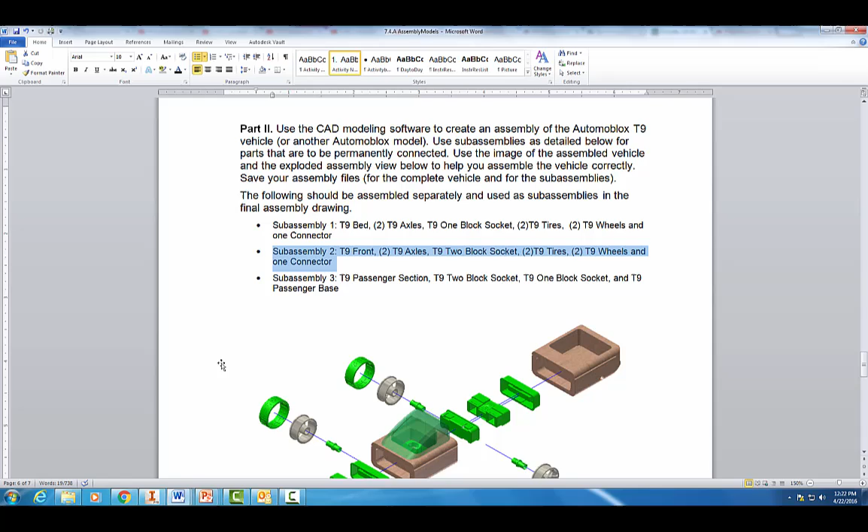Let's go ahead and go into Autodesk. When you're all done, it should look hopefully something like this.

Let's go to a new standard assembly file. Go ahead and hit create.

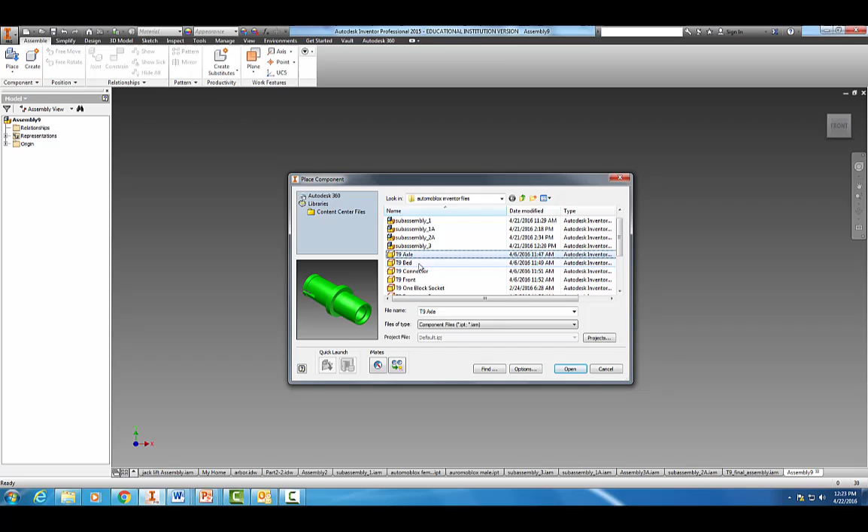Let's go ahead and place our parts here. We're going to have to bring in more axles, wheels, and tires. So we want the axle, the connector piece, and the T9 Front.

Hold down control and you can select more than one. The 2-block socket, let's see here, we got the tire and the wheel. Okay, let's hit open, place them there, hit escape.

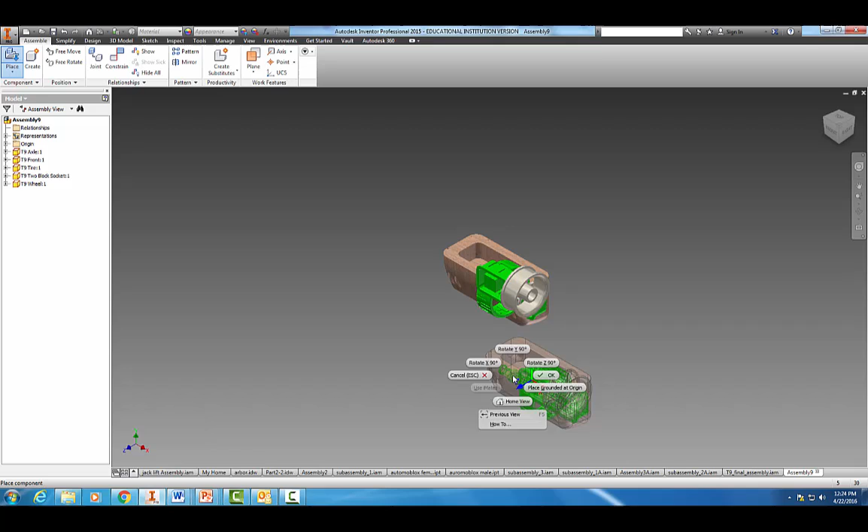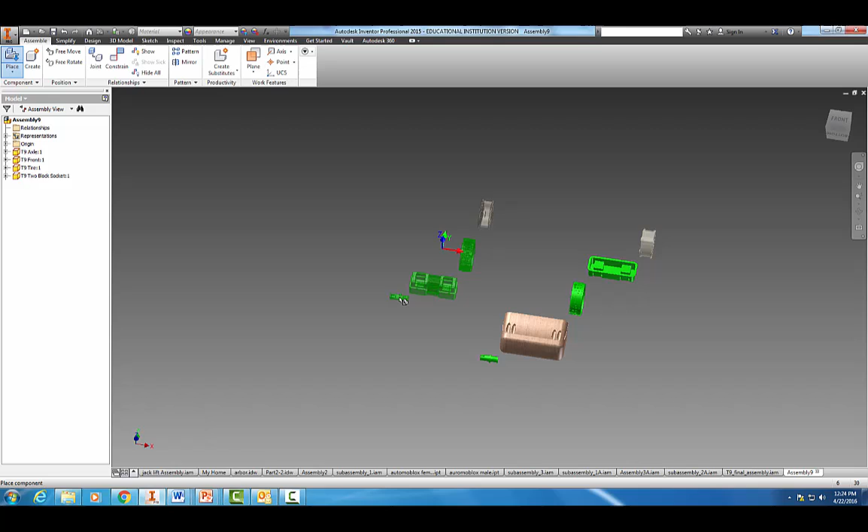So we have that. I didn't get the connector piece, but we'll bring it in here. So let's bring in the rest: the connector, hold down control, we're going to want another axle, and another wheel and tire. Hit open, let's place them over here, hit escape.

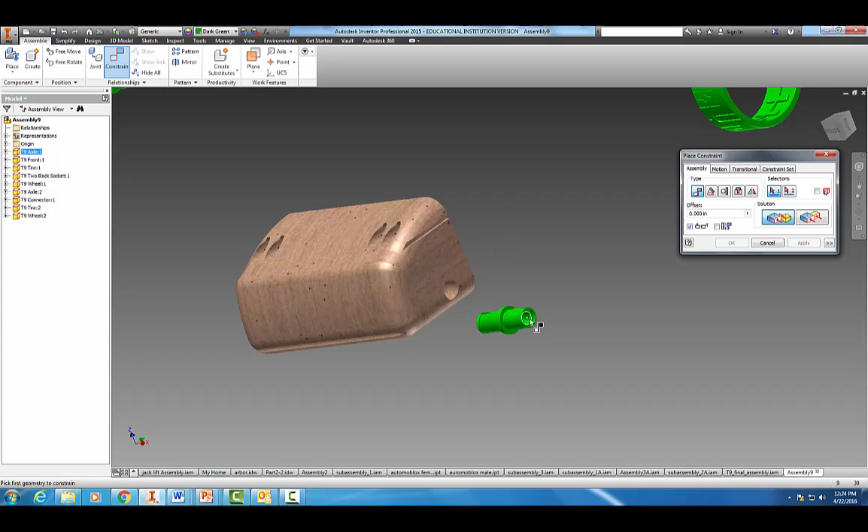Let's go ahead and start putting our axles in first. You guys have done this before with the back end of the T9 part. So we're going to go to constrain here, and once again, let's do that axle to that axle. Apply, cancel, and let's drag it out so we can better see it here.

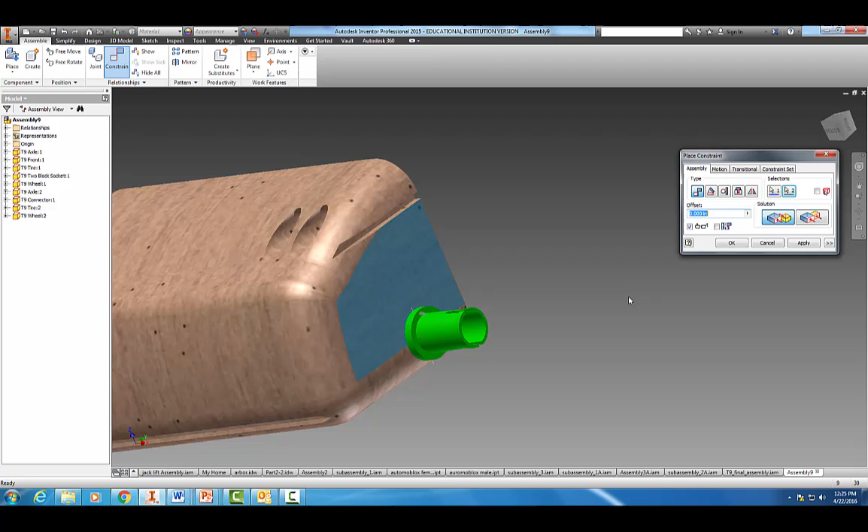Once again, constrain, I'm going to zoom in. We want this face to mate with that face. Hit apply and cancel.

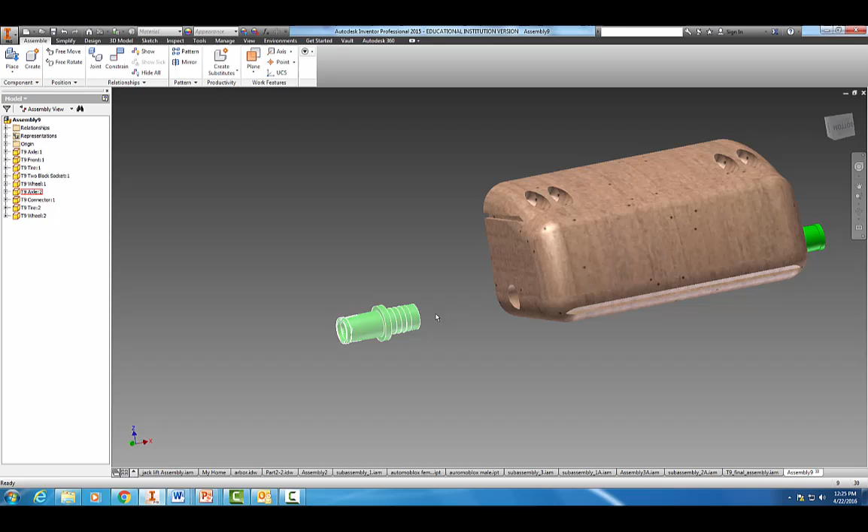Real quick, let's do the other axle. Apply and cancel. I'm going to do the same thing here, a mate with that surface to this surface. Apply and cancel. Okay, looks good.

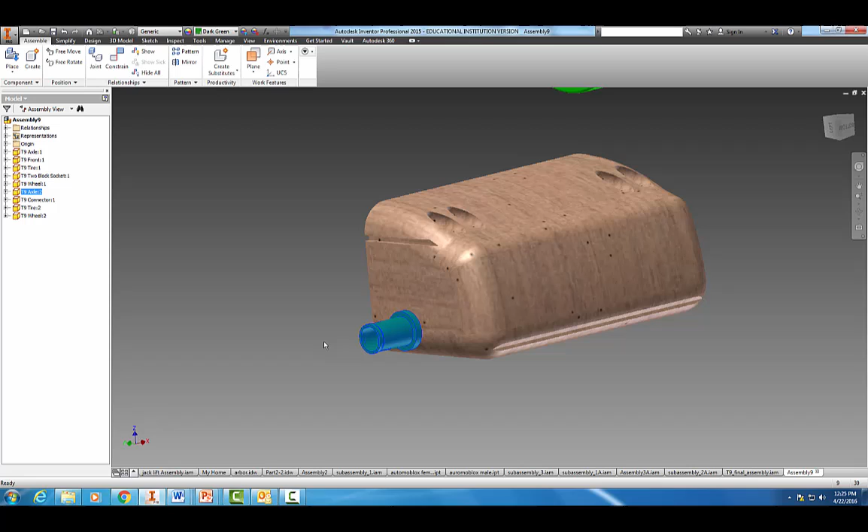We got our two axles in. Now remember, we're only constraining them 2 times, so that will allow our axle to spin. If we added a third constraint, it wouldn't spin in here. Okay, I'm going to zoom out.

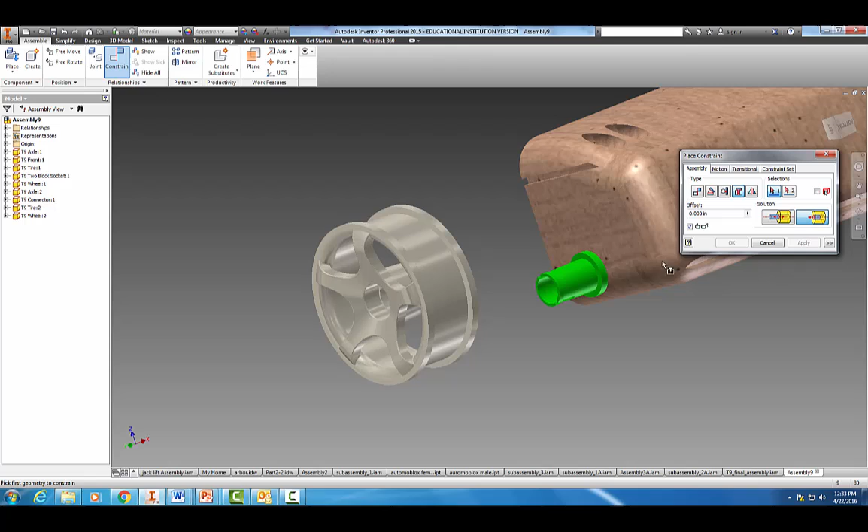Let's bring in our 2 wheels here, bring them over here. Okay, let's grab our constraint, and this time we're going to use an insert constraint, and we're going to select the aligned option. We're going to come from this edge to that edge. Apply, cancel. Let's go do the other side.

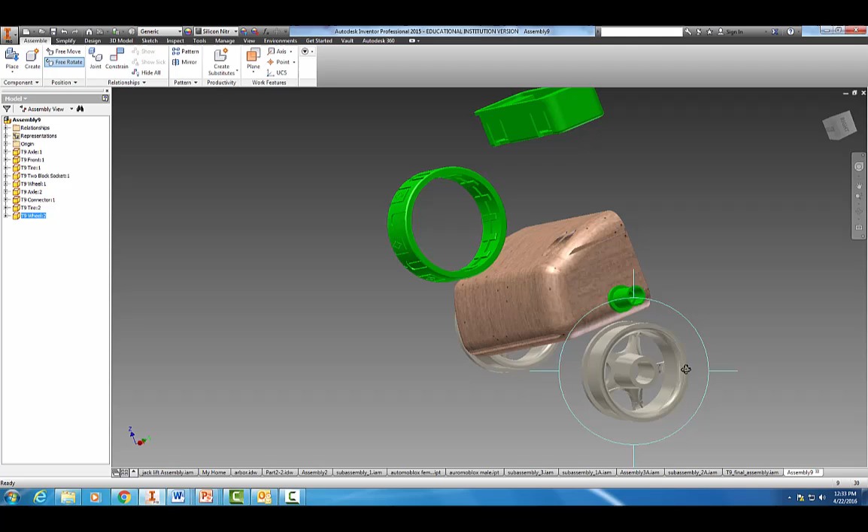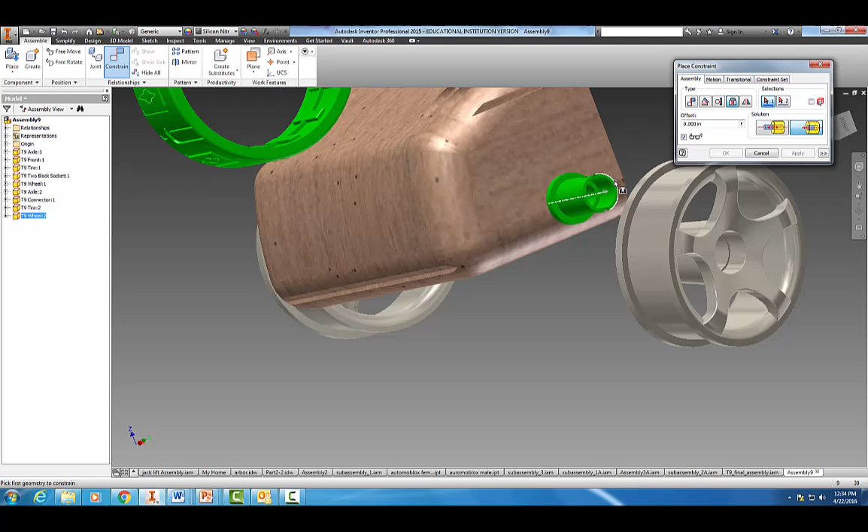Okay, I'm going to turn this guy around, do a free rotate. Do a constraint, same constraint we just used, insert, aligned. Try that again real quick. Okay, got our wheels on.

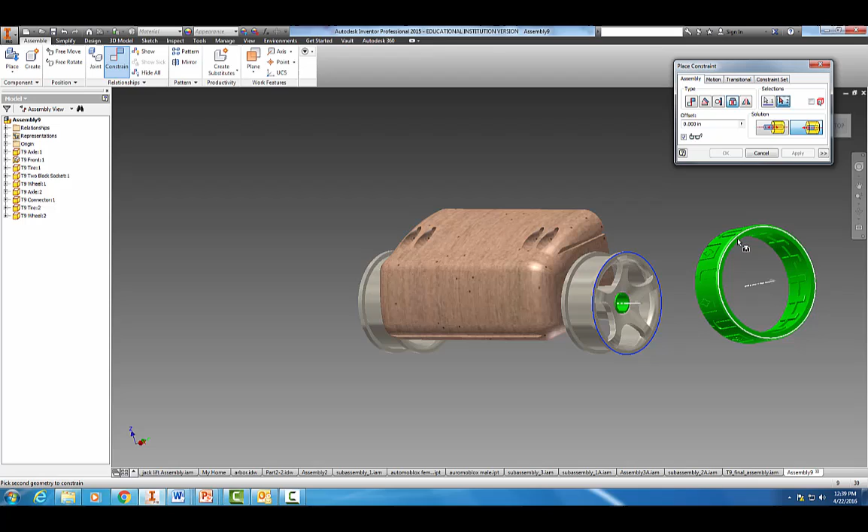Let's bring our tires over. Okay, let's grab our constraint again, and we're going to use the same one, insert and align. We're going to find that outer edge here, and let's align it with that outer edge. Okay, hit apply, and now cancel.

Let's see here, so let's minimize that in our origin. Okay, tire, same thing. We're going to constrain our XZ plane here to that XZ plane so they roll together. Apply and cancel.

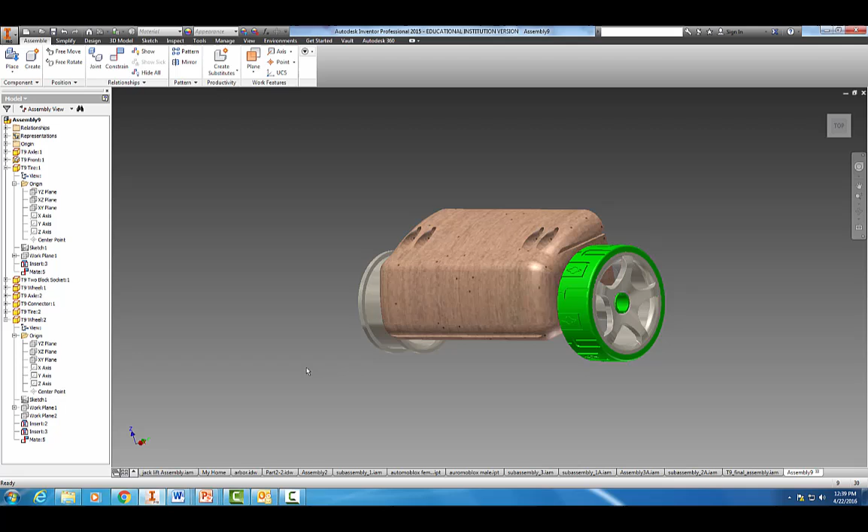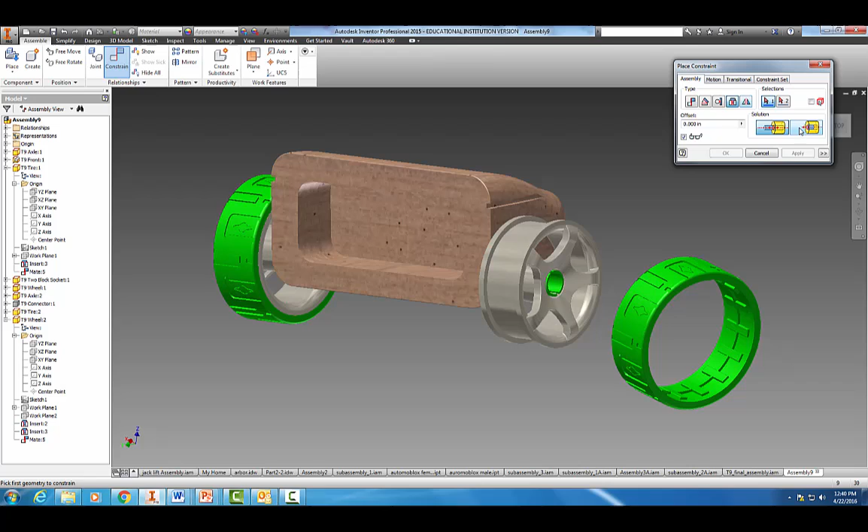Okay, now let's put on the other tire. Same thing: insert, align, that one to that edge. Hit apply and cancel. Alright, I'm going to minimize these again.

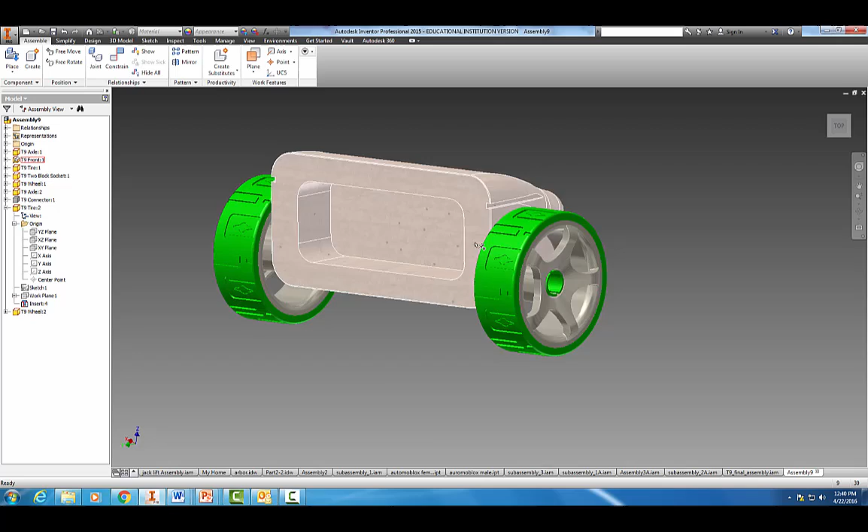Let's see, that is this tire. Hit the plus sign, origin, see what the wheel is - wheel 1, and once again the origin. Constrain those same axes we just did, XZ to this XZ, and hit apply. Cancel. Okay, now let's put in our 2-block socket.

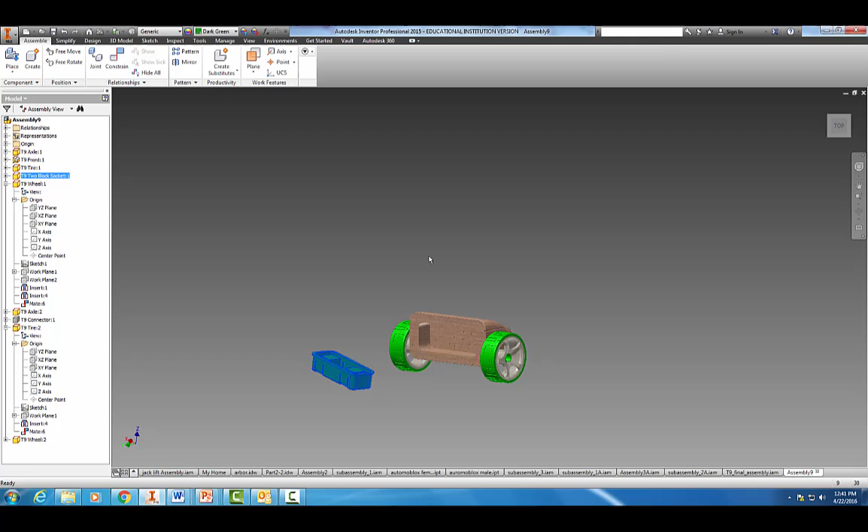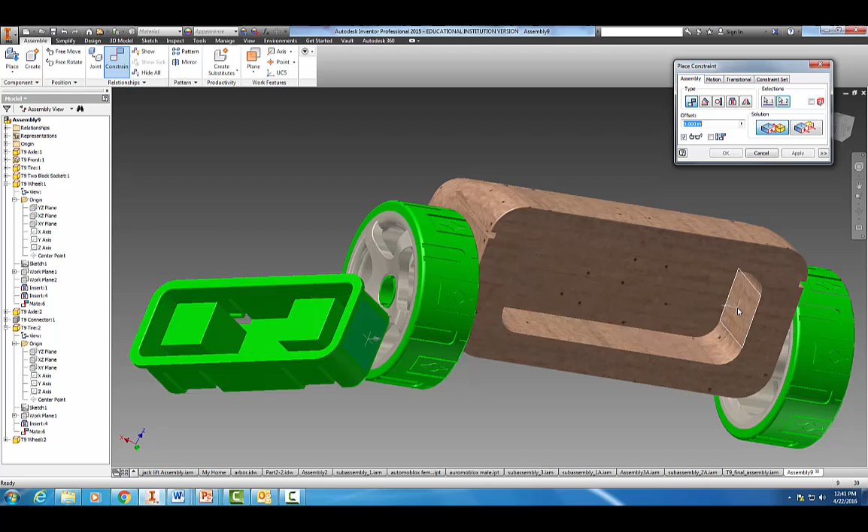So let's go ahead, I'm going to just do a quick free rotate. Hit escape. Let's do a constrain mate, that surface to that surface. Apply. Let's do one more, that surface mate to that surface. Hit apply, cancel.

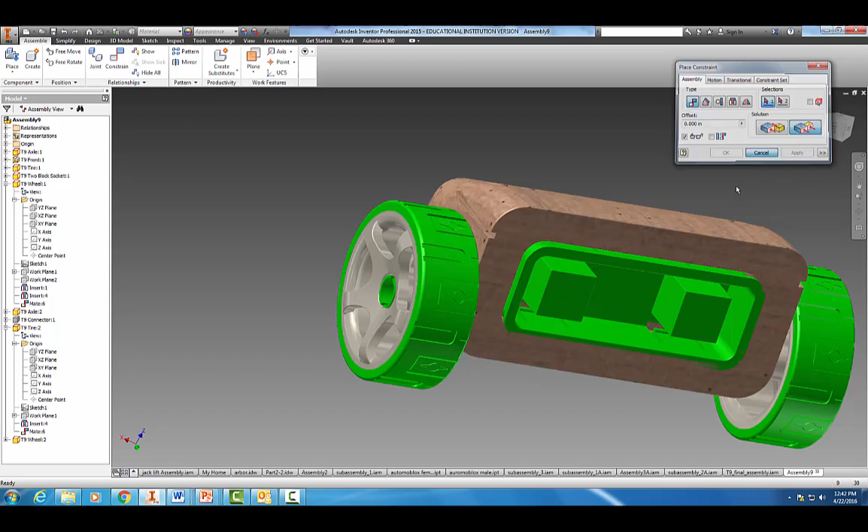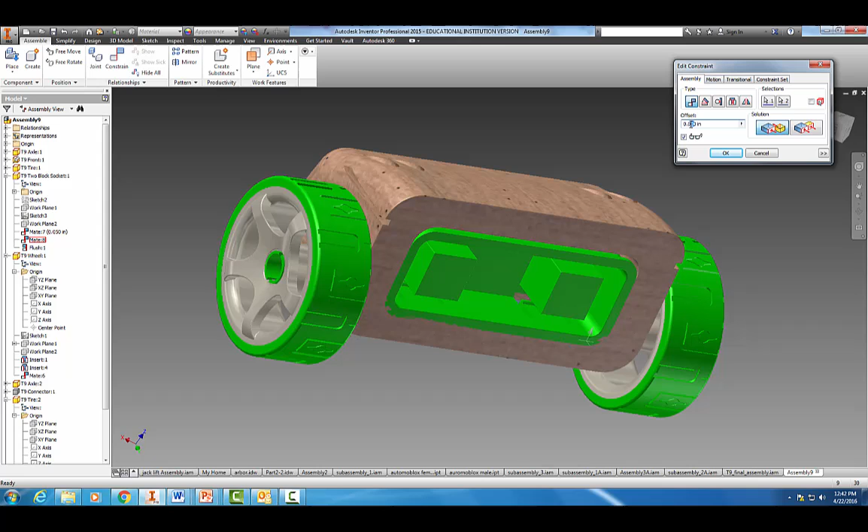Now I'm going to move it in just a little bit, and I'm going to do a flush, make this side flush with that face. Hit apply and cancel. Now you notice it's not properly centered, so once again, as we did in the last one, come over into these mates and just kind of offset them a little bit. Okay, looks pretty centered.

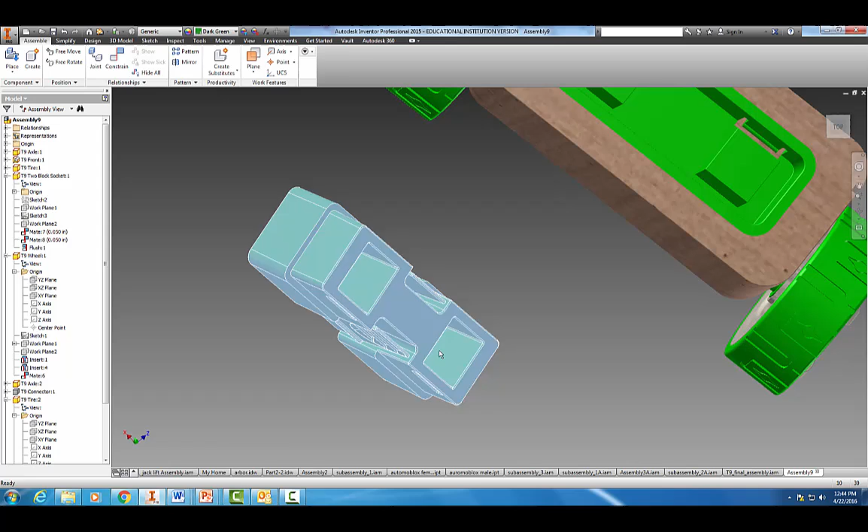All right, now let's go ahead and grab our connector piece, do a quick free rotate. We want to align those 2 blocks here, so we're going to go to constrain. Let's do that surface to that surface. Apply and cancel.

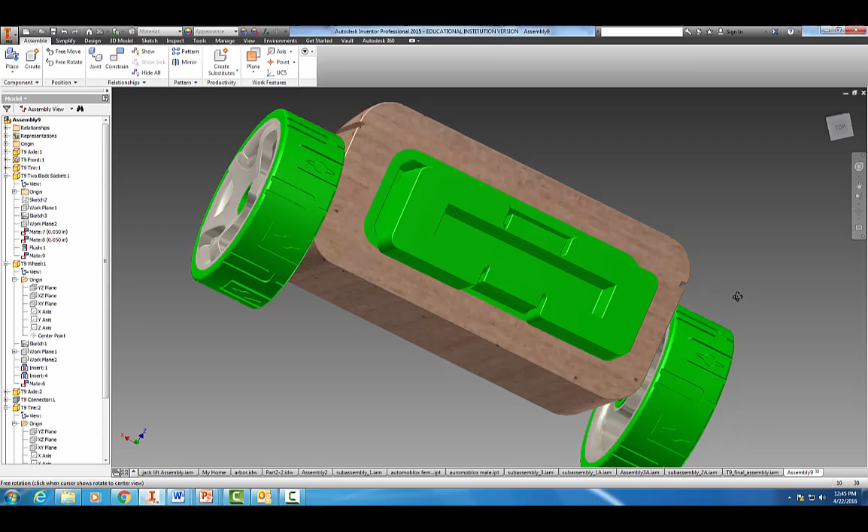Now the rest of the connector piece is a bit tricky. Once again, you can mess around with mate constraints and flush constraints, or you can just use the planes, align them by planes, which I think is the best way to go about it, or even the axes. Okay, so let's try that.

Actually let's hit cancel, I'm going to minimize everything here. We have our connector and our 2-block socket. Okay, so let's try constraining some of these axes here. Let's try centering it by doing the YZ plane and that YZ plane.

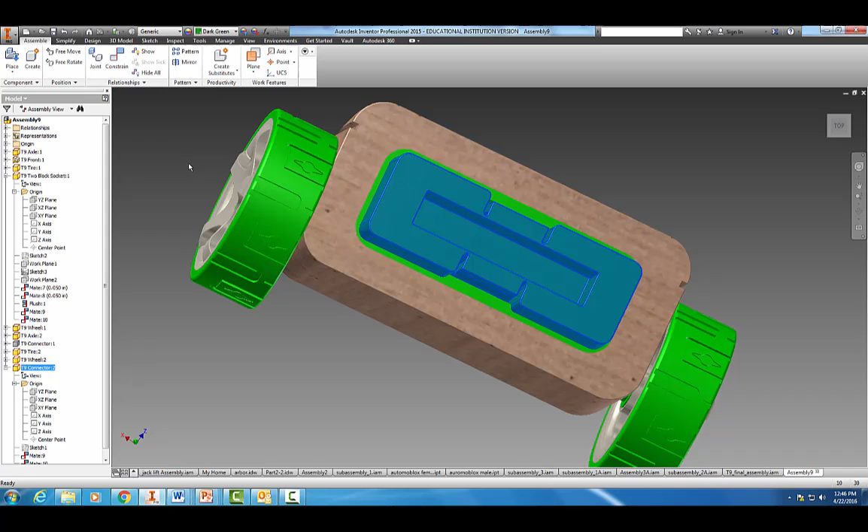Okay, that worked well, but notice it still moves vertically up and down. So maybe try a different plane here. Let's try the XZ plane here to the XZ plane. Okay, and if you get an issue, just hit cancel and try some other things. So we can try the x-axis to that x-axis, and that's not going to work.

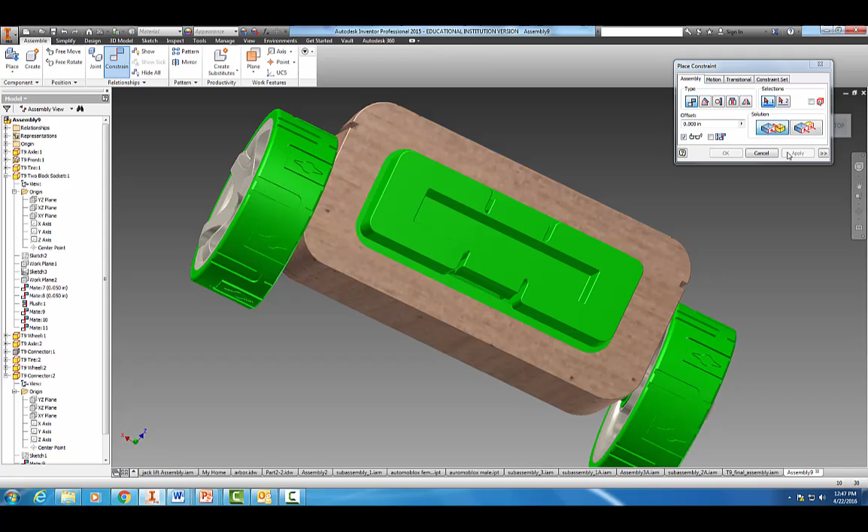All right, let's go with another one here. Let's maybe do the Z and the Z. Okay, and that seemed to work. Apply and cancel. Check to make sure it doesn't move. It's locked in there good. Okay, and there you have it.

There is the assembled front end section here of your Automoblox car. Take a screenshot of your work, save everything, and we'll see you next time.